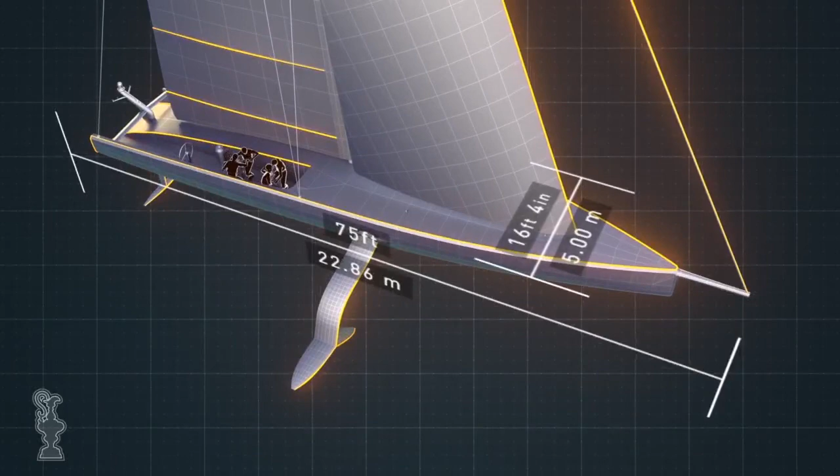completely different. To start with, it's big, 75 feet long, 16 feet wide. But it's also light, which is crucial because the AC75 is designed to fly. And it's different. Rather than a keel, a brand new concept keeps it standing. Foil cant arms move under or outside the boat to provide the leverage it needs to stay upright.

When we developed the class rule, we really wanted it to be quite open. So designers have a much bigger area in which to play. We wanted to allow space for innovation and space for different teams to design different hull shapes, different ways of controlling the sails, different foils and rudders.

The challenge obviously is that it is completely new, so no one has ever seen such a boat on the water. There was no experience. We could not build on something existing. It's not only a new rule, it's a new type of boat that the world has not seen before. What we tried to achieve was a boat that really can surpass the past America's Cup boat as technology. And to beat a multi-hull, it's a pretty tough challenge to do.

But as a concept, it was a challenging design to get right. We haven't seen anything like that before in the history of yachting, of sailing. So that was one of the main challenges. It was a risk that we took. We developed the class, wrote the rule, and everyone embarked on building these AC75 yachts when there'd been no prototype. So everything that we developed in the class was through simulation.

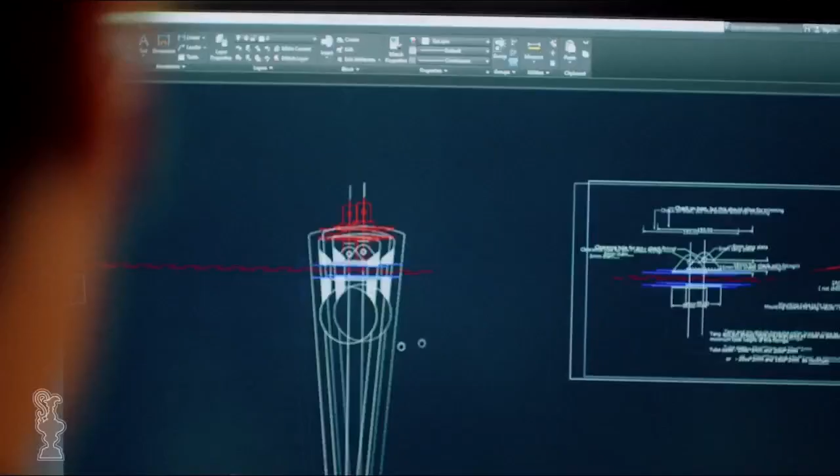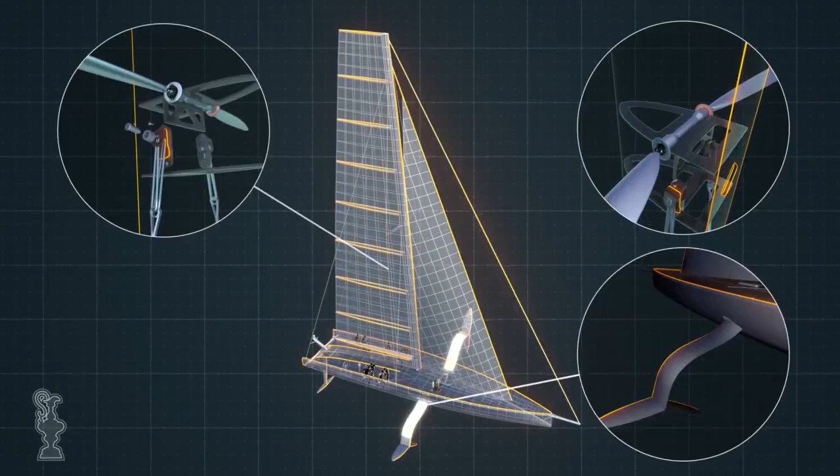Parts of the boat are supplied. The mast, rigging, foil cant arms and their hydraulics are all stock components. But there are still plenty of areas that designers can experiment with to find a race-winning edge. There is lots of free thinking in this rule, and it was done on purpose actually when we worked on the rules. So the design space is really big. That gives plenty of opportunity for thinking out of the box.

The best proof for that is that we see now 4 boats out there, and the 4 boats look very different. One of the biggest differences I think we've seen thus far is the differences in hull design. That's probably the most largely talked about item of the 4 boats that are out on the water at the moment. Every team has taken a slightly different approach to the same problem.

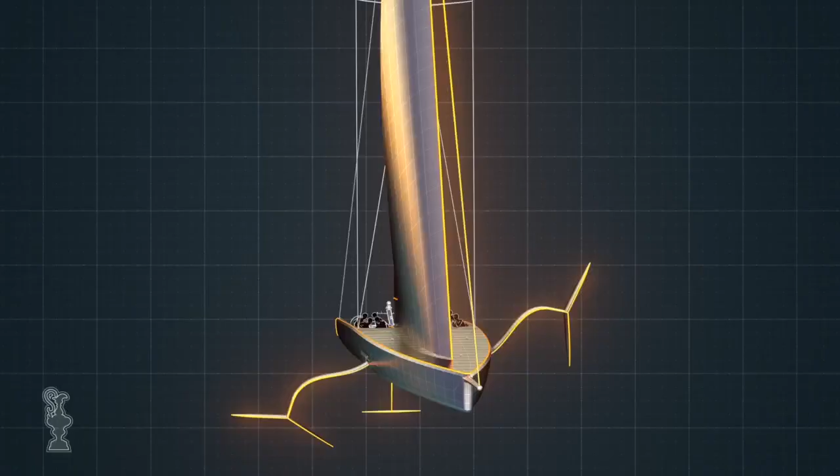So I would say there's on one side American Magic and Ineos. They have pretty flat hulls. And then there's Team New Zealand and us. We have these hulls with a hump at the bottom. That shows that we had quite different ideas on how the boats will be sailed.

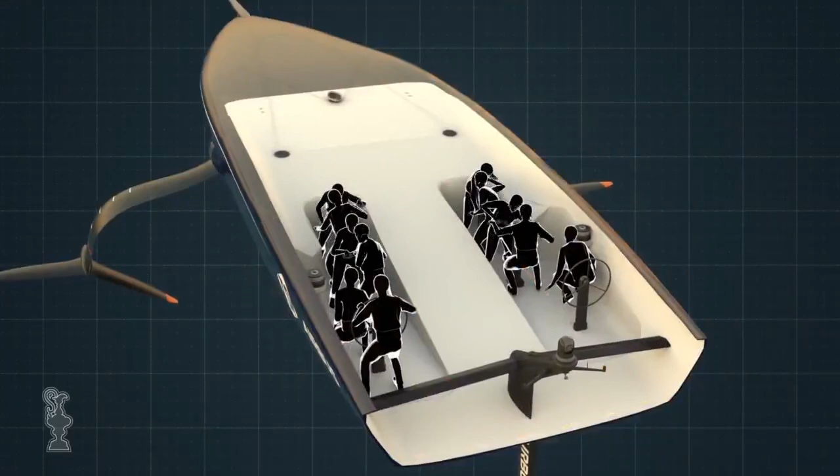One of the fundamental decisions you've got to make is whether the crew are going to transfer from windward to leeward through a tack or a jibe. It's a really interesting design trade-off there of whether you move the crew or keep them fixed. We'll find out who's got it right and who's got it wrong.

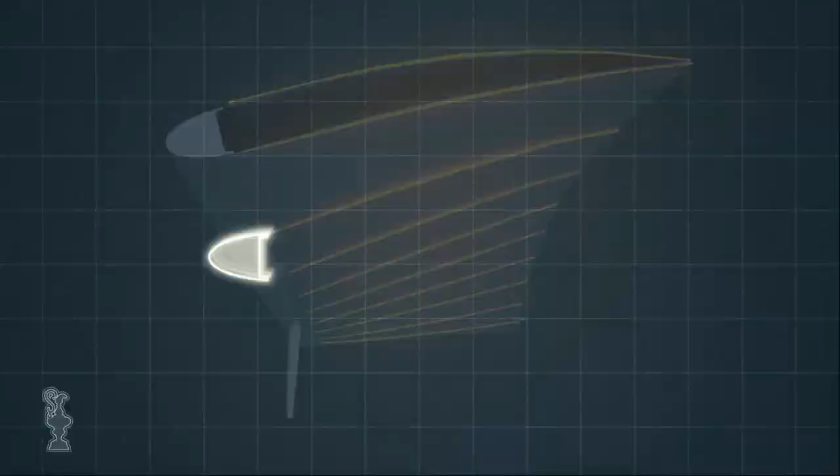A new evolution is the twin skin mainsail. The double sail skins combine with the spar to form a wing, generating the power the AC75 needs to foil. A sail is effectively a wing that stands vertically. So instead of just a single mainsail that a conventional yacht has, we've got a twin or double-skinned mainsail, which gives a really efficient aerodynamic section. If you took a cut through that, it would look like a D section at the front with the 2 skins coming aft, much the same as an aircraft wing.

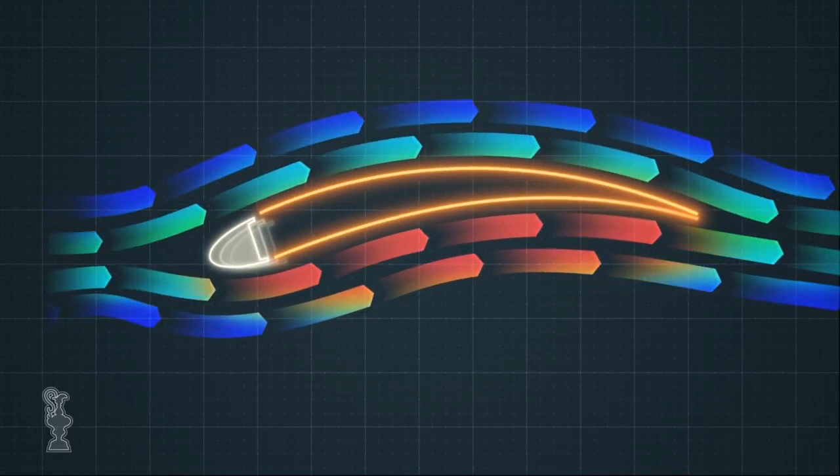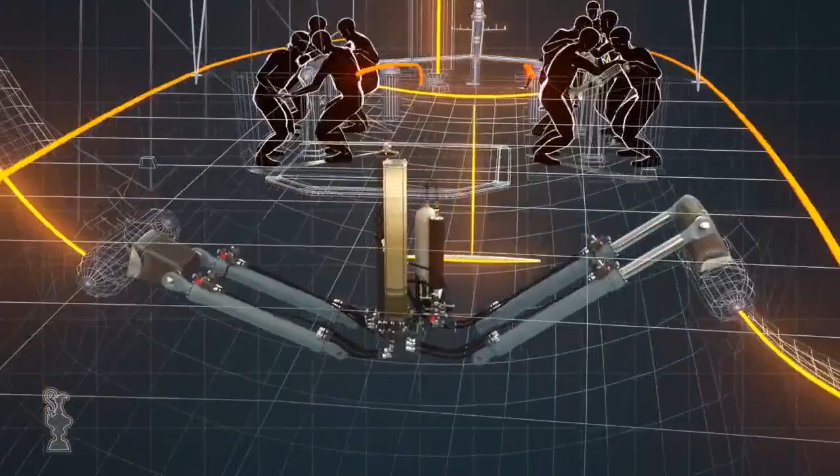Underwater is where things get really interesting this America's Cup, but the story starts inside the boat. The foil cant system is brand new technology, a battery-driven hydraulic power unit that supplies the energy to lift and lower the immensely strong and heavy foil cant arms. As the boat swaps tacks, the cant system is activated, placing one hydrofoil in the water and lifting the other one out, where its weight becomes ballast.

At the end of the arms lie the team's secret weapons, the foil wings. Apart from basic rules governing dimensions and weight, these are open territory for designers. Foils could well be the area which decides the next America's Cup.

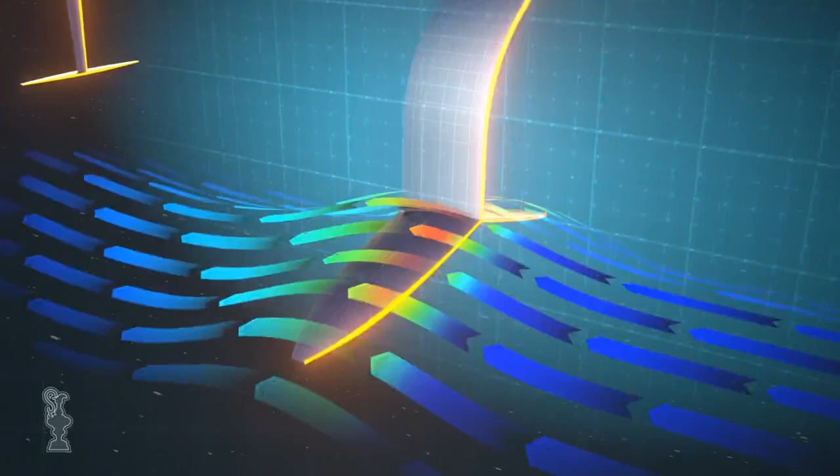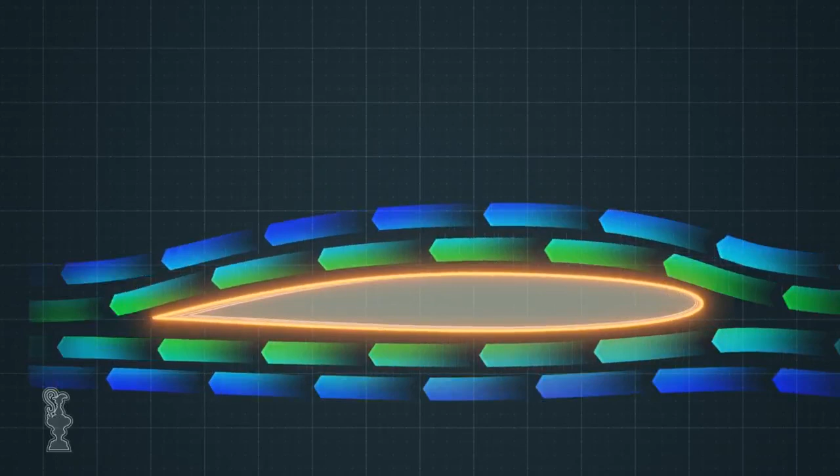The principles which allow an AC75 yacht to foil are basically the same principles that allow an aeroplane to stay in the air. So we've got an airfoil section on the foils, which is roughly the same cross-sectional shape as an aircraft wing, and the flow over the top of those foils is faster than the flow underneath due to the geometry of the section shape. That creates more pressure underneath, which lifts the 7.5 tons of the yacht and her crew.

A new advancement this Cup, the foil wings have trailing edge flaps, just like on a plane, providing extra lift on takeoff and giving the crews precise control over ride height. So for the foils, we decided to allow flaps on their trailing edges, which are much the same as ailerons or flaps on an aircraft, which can rotate to control the amount of lift, but ultimately it allows you more precise control of the lift and therefore the ability to fly.

The AC75 is one of the most radical design challenges ever presented to teams in the America's Cup, breaking new ground in design and technology, enduring hallmarks of 170 years of America's Cup competition.